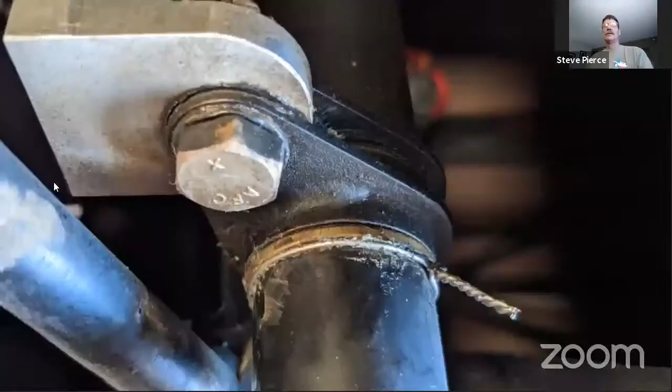So last week we showed the video of the leading edge of the horizontal clicking back and forth because there was a gap between the horizontal stabilizer and this liner tube. So last week I had to put safety wire in one - this is actually on a Carbon Cub, but same setup. You can see where I put the safety wire in between the liner tube and the end of that horizontal stabilizer to take out that slack. I just twisted the wire, cut it off short, and bent it under where nobody will catch their finger on it.

I don't think I covered this, but what I do after I cut - I've had this happen several times, had it happen on my dad's airplane after we put it together. You get paint and dope and glue and all that on the end of that tube, and when you pull it together to drill the hole and put this bolt in, you have to drill that tube. You get it all pulled up tight, but then over time, that paint and glue and fabric all wears off the end of the tube, and you get that slop. So what I've been doing is taking a flat file and going over the end of the horizontal on each tube, the rear tube and the front tube, and cleaning that off to no paint, no glue, and no fabric.

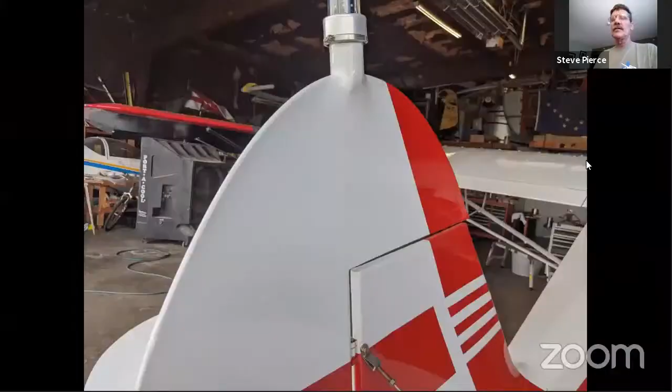Another thing, if you've got all different size holes there, take a piece of cardboard, draw the inspection like I do the wing roots - I've got a picture of that somewhere. I draw a picture of that opening, or all the openings, then take a pick and punch holes in it where all the screws go. As I take a screw out, I put it back in the drawing correspondingly, so I can put it back, because I hate when there's a number 4, a number 6, and a number 8, and you're trying to figure out which screw goes where.

It reminds me of the old flight school I worked at when I first got out of A&P school.

I don't know why this rudder picture is in here, the counterbalance. I think we're going to the rudder.

Okay, feel the bottom of the rudder. All the water tends to accumulate at the bottom, and if you grab that tube and pinch, you'll feel crunchy. That means you've got rust in there, and that's the easiest way to tell. You'll kind of see it, it feels kind of rough, and if you squeeze on it, it'll sound crunchy. Then you'll find what we found here on this one, where that bottom tube was all rusted out.

Now I've got a roller, and I roll this. We just take a piece of 4130 3/8, roll another tube, cut it out, and splice it in.

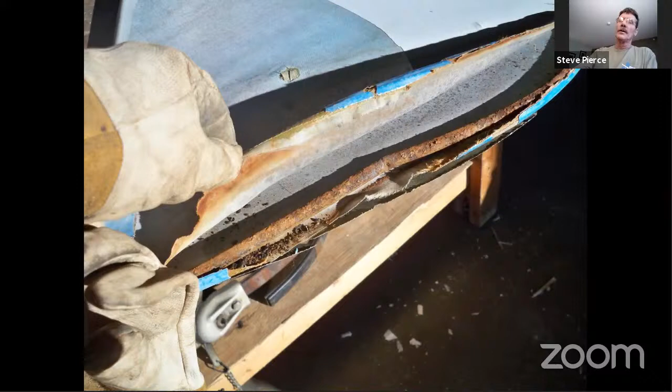Got that 114 Charlie - I found these held in with like one 3/16 inch bolt. There's supposed to be two 3/16 bolts holding that in. A common thing to do is grab where the rudder cable is attached, grab the welded-on steering arm for the rudder, then grab the tail wheel steering arm, the aluminum piece, and see if they move independently of each other. If they do, that steering arm is worn inside where those bolts are, and you need to address that, because it'll break that steering arm.

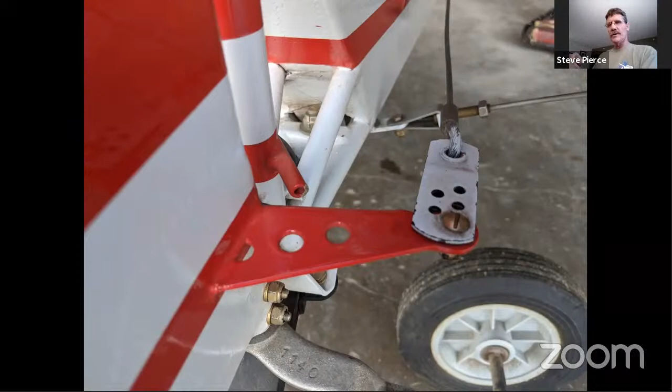It'll break it inside. I got some bushings, drilled and reamed, and put this oversized bushing through the rudder and through that steering arm - it's got a 3/16 ID. I just upped it a little bit and then put that bolt in there, and it took that slop out. But you'll have slop where you're trying to steer, moving the rudder, but the tail wheel's not moving at the same rate because you get all this slop in that steering arm.

There's another shot of it. That's those 2 3/16 bolts right there.

There was a discussion on supercub.org the other day about the tail spring attachment. This is a stock tail spring, and this one is a 1.25 tail spring with the original U bracket. That bolt that holds the bracket to hold the tail spring on - a lot of times I put a piece of rubber in there. Bill Duncan, when he was here last time, bought a big truck mud flap, and we cut strips of that on the bandsaw and punched holes in it, then used it between that tail post and the tail spring. It jacks it up a little bit to give a better angle, which helps eliminate the shimmy. I've seen fuselages where there's a worn spot where that tail spring has been wearing on that tail post fitting forever, and it gets a little wear in it.

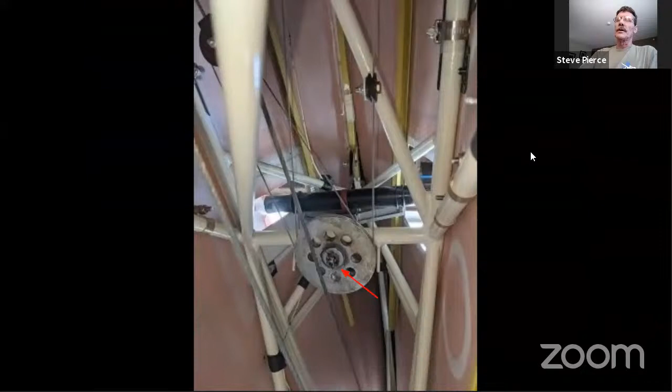Also, look at these - I look at every one. You see these clevis bolts holding between the rudder cable and the rudder. Those are supposed to be clevis bolts, not a 3/16 bolt, it's supposed to be a clevis bolt. Every cotter pin - and those are cotter pinned because they rotate - I put my eye and my fingers on every cotter pin on this airplane, because I've found missing cotter pins multiple times on control surfaces that would eventually fail and cause a serious issue, like lack of control of that control surface.

Also, you can see in that hinge right there for the rudder, that's got a cotter pin as well. And then there's bronze bushings in there. If you grab that control and it goes clunk, clunk, clunk, those bushings need to be replaced. I make a bushing tool to pull that bushing out and push a new bushing in - it's easier for me to use the tool than to just knock the old one out with a punch and knock the new one in with a punch. It doesn't mess up the bushing.

So anyway, some other stuff to look at just from looking at that picture. Okay, I went too far - can you go back one, Steve? I'm sorry, I'm impatient. Another common problem that I get into.

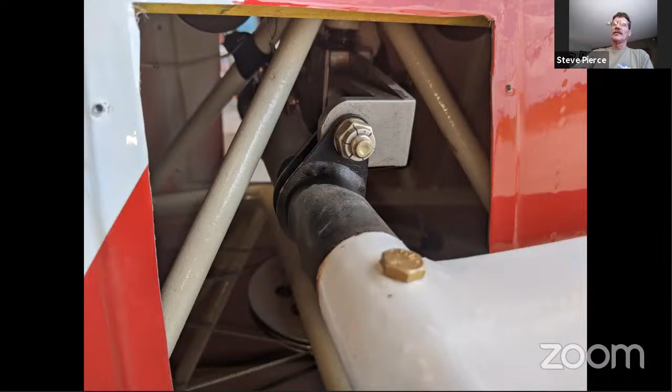So here's the outside view also, where this is a 5/16 bolt. Take the horizontal and shake it, move it back and forth, look and pay attention at what's moving. If you've got a clunk, clunk, clunk, sometimes these bolts will have slack in them. Piper used shim washers between the ears on the yoke and the ears on this carry-through tube, so you can shim that out.

You can also just do a quarter turn or a 16th of a turn of that nut right there and take some of the play out. But you want some play because that is a moving surface, and you also want to lubricate that. You don't want it moving back and forth, clunking between the horizontal and the carry through tube, or between the carry through tube and that aluminum jack screw yoke. So lubricate, inspect, and tighten if necessary.

This is a video. Let's see if it will play.

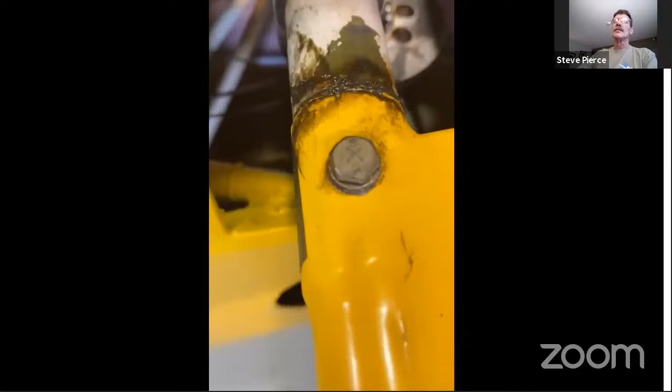Okay, this is the play that I was talking about where I put the safety wire. This is a custom job. I met a mechanic recently, a friend of a friend, who isn't familiar with Cubs and sent me this video. Dang, Steve, your internet's not very fast. There it goes. And he goes to the other side because he doesn't realize how it works.

Steve, do you have any more videos? Nah, that was it. Okay, I just didn't have the volume on, that was my bad. Well, if you want to play it again, it was going clunk, clunk, clunk.

Hang on, let me see if I can figure that out. Jason? Yeah, he works for me.

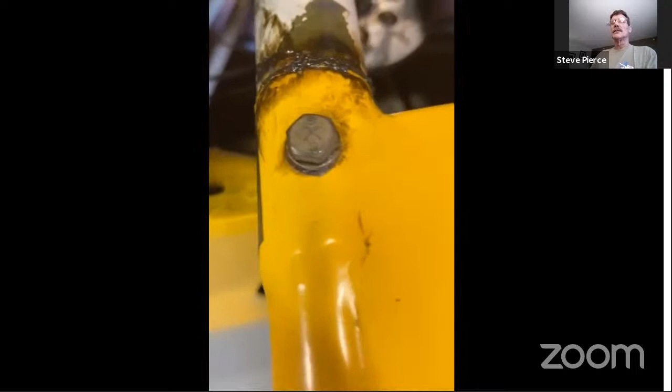That was it. The safety wire fills in the gap. There's a gap there, and you're just taking out the gap with the safety wire, Peter.

All right, you can go to the next one, Steve. It's not letting me for some reason. Okay, try it now. Yeah.

Okay, so this is the rear liner tube. There's a front liner tube and a rear liner tube. When you run the jack screw, when you run your trim, you're moving the leading edge of the horizontal stabilizer up and down to trim the airplane. It's pivoting on this rear liner tube that's depicted here. Now the fabric's off, and this is one that's in the shop for rebuild. So what we found is this rust between the fuselage and this nickel plated tube.

So there's a hole in that steel tube in the fuselage, and that's supposed to be an oil tube. You're supposed to put oil in that hole to lubricate between that liner tube and the fuselage, and that oil will creep in there and lubricate it. If you don't lubricate it, it'll seize up, and I've seen horizontal stabilizers actually bend instead of rotating on the fuselage. They just flex the whole stabilizer.

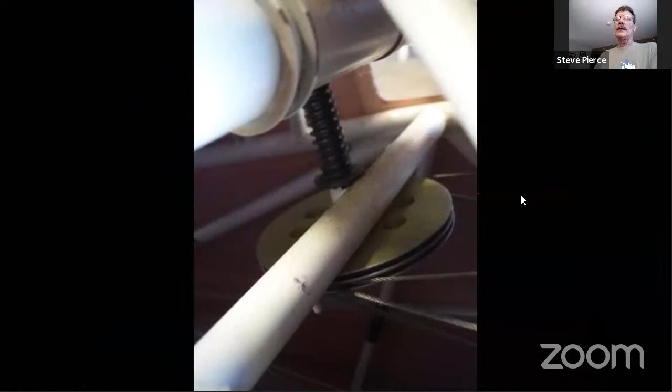Okay, here we go, being contrary. Here's the washer, there's the larger washer that I was talking about that's between. See, that's not supposed to be there. That washer, that large area washer that's at the base of that jack screw should be on top of that pulley. So what this one was doing is the pulley was rubbing on this cross tube.

You got to look at the parts diagram, and it's better if you look at the drawing, you can tell from the drawing what it does. If anybody has a question on that, I don't have my parts manual with me, but I've got those call outs with which washer goes where by the size of the washer, which is confusing because you don't know which washer goes where unless you have the drawings and look all that stuff up, or you buy new parts from Univair and take it out of the bag and go, this is this part and it goes here.

I don't even remember what kind of grease I use, to be honest with you. It's in that inspection sheet. It tells you what mil spec, and then you can cross it over to Aeroshell. But I use a high pressure graphite grease when I assemble it. You just don't want it to corrode. But I don't remember what the particular grease is.

And this is looking down through that jack screw at the pulley, and this is the one that doesn't have the big washer. It's supposed to be a larger OD washer between that pulley and the fuselage, and it acts as a spacer so it doesn't rub on the fuselage. I don't know why I put so many pictures of the same thing.

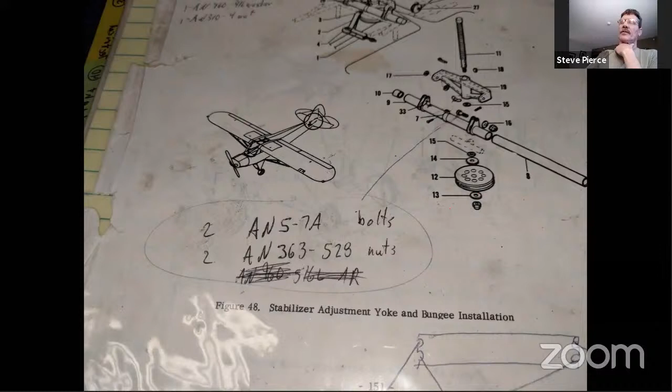Here's the call out. Here's some of the call outs. Those AN5 bolts that hold the carry through tube to the jack screw yoke, and this is all pictures inside of my parts manual. More call outs of different hardware stuff for that jack screw assembly.

And the nice thing, Steve's got the Northland CD, or now I think it's on a stick, but it has all of these call outs in it. If you look at the drawings, if you're going to rebuild this or get into it, I would highly recommend that call out. Now here's what I was looking for.

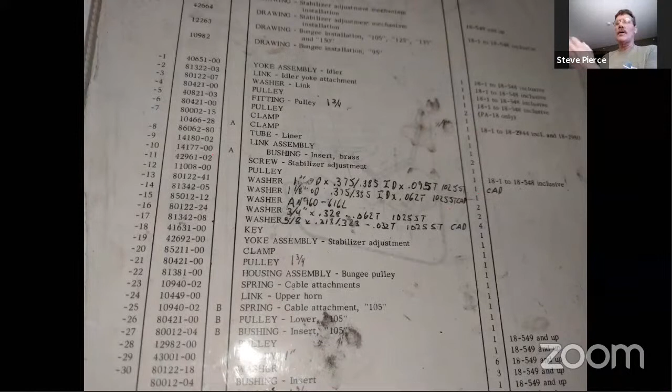So if you look at these part numbers, and the picture that it just showed, that 80122-41, that washer's 1-inch OD, okay, and then the other washer is the 1.125. So one's on the top and one's on the bottom, and you'd have to look at the item number over here. But these are my notes from going through all those drawings. So if you take a screenshot of that or write it down, but those are my notes on those washers. And what I did is I looked up all these part numbers of these washers and got the OD and the ID and the thickness and all that, and then I wrote that in my manual. So I put it together correctly from now on.

Now, the later Cubs had these fittings out of stainless. The earlier ones had them out of steel, and you'll see them really rusty and bad. If you buy them from Univair, they're made out of stainless, and they don't rust on the edges and get all nasty looking like the steel ones do. So they're not cheap, but it looks a lot better and probably lasts longer.

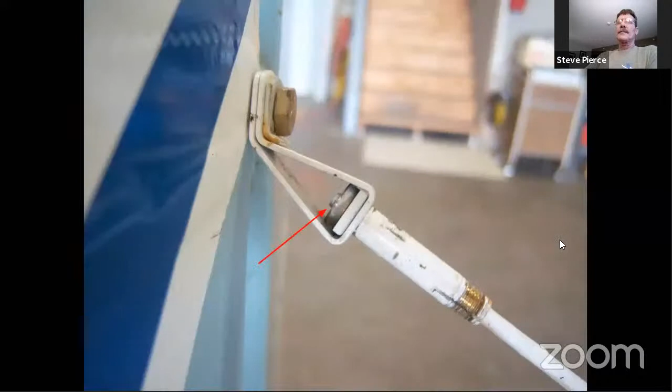The other thing to look for is these tail brace wires are threaded, and you can see in the arrow, just one or two threads sticking out on that end. Well, you want to make sure that you have threads extending into the nipple on the other side, right here. I found them where you got a whole bunch of threads on one end and no threads showing on the other. So you need to balance that out, because that's what's holding the tail, keeping the tail square. If you rip those threads out of that brass nipple because you don't have enough thread engagement, that'd probably be a bad day. See, this one, there's no thread sticking out.

And there's a 1/4 by 3/16 bushing underneath the head of that bolt. And there's also one on the fitting on the bottom. You've got tail brace wire on the top and another one on the bottom. What happens when you trim the airplane is that rotates ever so slightly on that bushing. That tail brace wire fitting will rotate on that bushing on that bolt ever so slightly.

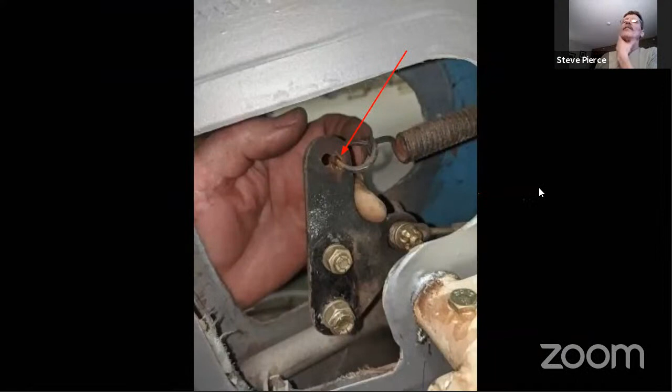So here, now, if you notice this opening for the elevator control is taller than a lot of, this is a later model Super Cub, and they started making that grommet taller than on the earlier one so that you could get to that bungee spring on the elevator. The later Cubs and the Pawnees all had the same grommet and had a taller inspection plate right there. It just makes it easier to access.

You can also see the grease zerk for lubricating that rear liner tube. And then you've got your bungee spring attached to the top of the elevator that is going to, as you trim the airplane, pull that elevator.

So before we got on this, Mark Inglerth and I, Mark's thrust line Mark, we call him. He's kind of the rigging guru, and he wanted me to cover some of this stuff on the trim system because a lot of people get confused on what that bungee spring's doing and what it's supposed to do to the elevator. So I'm going to read Mark's note to me.

He texted me this a minute ago. And he says, as you crank nose down trim in, the stick will be moving forward and come to a stop when the elevator is on its stop. So as you're cranking in the nose down trim, that stick's moving forward. You should have 5 or 6 full turns left when nose down with the elevators hit the stop. In other words, once the stick stops, you should have 5 or 6 more turns of nose down trim before the trim bottoms out.

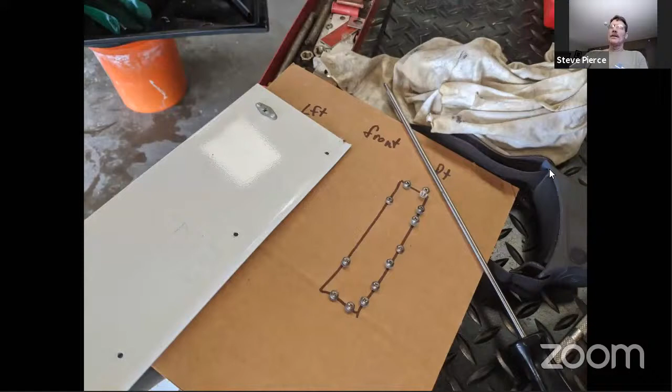So thank you. So this is the flip up window, and this is removing the wing root fairings.

So this next picture, when I was talking earlier about taking cardboard and drawing things out - in a lot of these airplanes they'll have all different size screws, and when you're going back you don't want to put a number 8 screw into a number 4 hole, because now you've just enlarged that hole. So what I do with this wing root fairing is take a piece of scrap cardboard, draw it out with a magic marker, take a scribe, and poke holes just like what's in the airplane. Then I put the screws back in the cardboard just like they came out of the wing or the inspection hole, whatever it is. That way it saves me time and aggravation when I go to put it back together.

Now this particular airplane I rebuilt, and I put Tinnerman nut plates in everything, so they're all number 4 screws. But in my own airplane, I've got every size known to man in there and a bunch of zip ties, because it wasn't done that way when it was rebuilt. But that's just something I do that I found works easy.

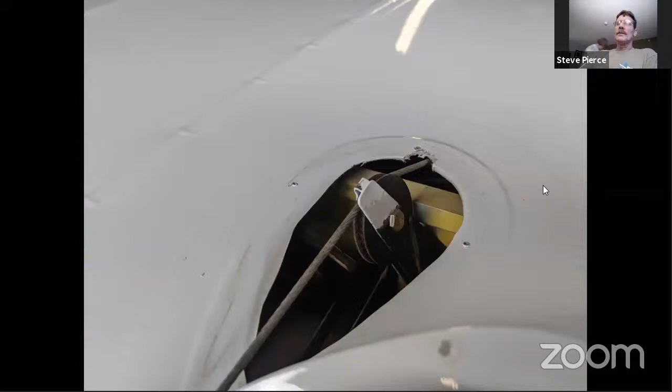These pulleys here are on top of the wing. That's the aileron cable, it's got the teardrop grommet over it, and these need to be lubricated and checked. I had a Carbon Cub recently with about 500 hours on it, and I always stick my finger underneath the cable and manipulate it - move it back and forth, make sure the pulley turns, and then feel that cable for whiskers. Well, both top aileron cables on this airplane had bad whiskers on it.

The only thing we could decide, because I've maintained quite a few Carbon Cubs, is this was just a bad batch of cables. Both those cables had some pretty bad whiskers on them. So I like to lubricate this pulley and manipulate it, make sure the pulley's rotating, and then check those cables good.

And check the cotter pin. Also, if you look at the leading edge here, see where I had to notch? This is that Cub that I rebuilt. I lined that cover up before I covered this airplane. When I put that grommet on, I had to cut it out a little bit for that cable because I didn't want the cable rubbing, and I'm using an aluminum grommet instead of plastic. Yep, LPS2 is what I use.

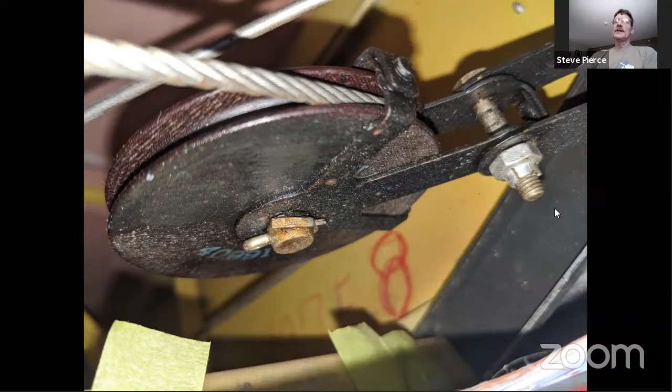Looking down the wing, paying attention for anything abnormal. These are the pulleys inside the wing, the main aileron cable. Same thing - look, feel, manipulate, make sure things are routed correctly, not rubbing on anything. You can see the cable here. I've seen them rubbing on all kinds of stuff. This compression strut here, John's was wrapped around - they put the compression strut in backward. That's an end strut, and they put some friction tape on there to keep it from rubbing through.

It was like that anyway. He got it fixed when he rebuilt the wings. But you know, just stuff to look at.

Rib stitching - now this cross brace is just for prior to rib stitching, it just keeps the ribs squared up. Mice will eat that, make a mess, whatever, but once it's rib stitched that stuff doesn't matter. Look for cut or missing rib stitching though, because mice like to eat that stuff too. That can mess up your day.

This is where that cable's coming out to that pulley on top of the wing. Look these fittings over - you see all this steel. You've got steel and aluminum, and on these later Pipers the aluminum's primered, but the earlier ones weren't. This airplane was a '79 model, and it'd been in West Texas all its life - you don't see rust on the steel, but I've seen some that were just horrid looking. These are those strut attach fittings that the service bulletin is on.

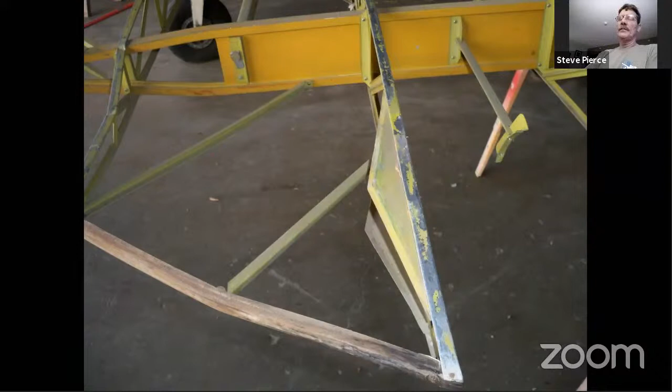They can be broken, but you can see this black at the trailing edge - that's where water settled in the bottom of that trailing edge of the wing. What happens, especially with dope, is it starts pulling and takes the roundness out of that tip bow, and you get flat spots. You can see that rot starting there at the trailing edge. There should be a drain hole at the bottom of that, right at the tip of the tip bow and that rib, so any moisture can drain out.

You can see this one's pretty good - got a pretty good flat spot, and that's really evident on airplanes done with dope, where the dope continues to shrink over time. Whereas with polyfiber and Stewart's and some of the polyurethane systems, you get the shrink out of the iron and then that's it. Nitrate will continue to shrink fabric and pull things.

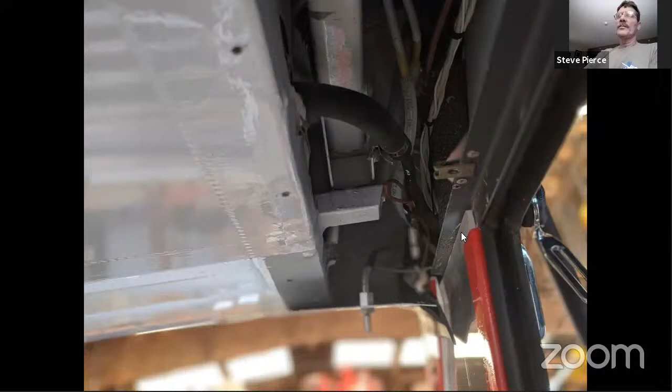Looking forward on the front left spar, you can see a probe for the outside air temp on an EI gauge, and another fuel line coming out of the tank into the tubing. You've got a rubber hose coming out of the tank, then it goes to an aluminum line down the wing root, down the windshield pillar.

And then you've got this - this is all headset jack wiring coming aft to the wing root. Just make sure all that stuff's tidied up.

See this blue? You can kind of see this blue stain, and this is wet - that's what you're looking for. Make sure that, because it can drip on the fabric, mess up the finish, cause a fire, whatever. But that's what we're doing in an annual inspection - that's what we're looking for. Smoking guns.

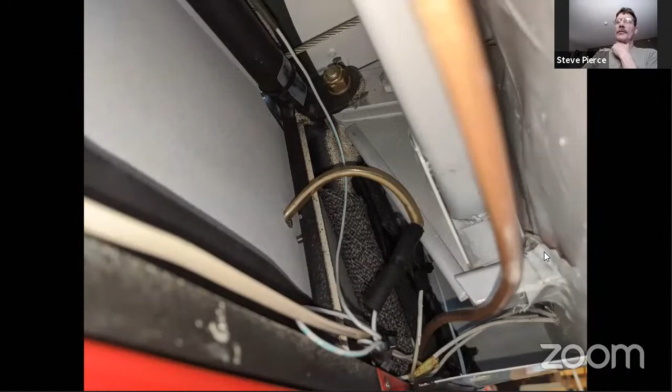Here's the wiring again - ELT wire going up to the remote. You've got a wire here going into your overhead light to shine onto the instruments, a piece of coax for the antenna, and your nut for the wing attach, and then there's a wire there.

That wire's not rubbing on that aileron cable going through there, is it? Hopefully not - that could be bad. That wire should be tied up where it's not touching, where it can't get onto that cable.

Also, you see up there where that cable's coming through - that's a piece of Teflon wrapped around with a zip tie. Now Piper used a piece of like phenolic cardboard, and they used friction tape on either side for that, so that cable wouldn't rub on that tube right there as it comes into the fuselage from the wing.

Here's the left side with the pitot and static lines, and you can see the cable and the nut and fuel - there's a lot of stuff going on in there. Look and look again, because like I said, there's a lot of stuff going on. You want to make sure that you don't have something rubbing on something or anything like that.

Another fuel line. Then you see the headset jacks back there.

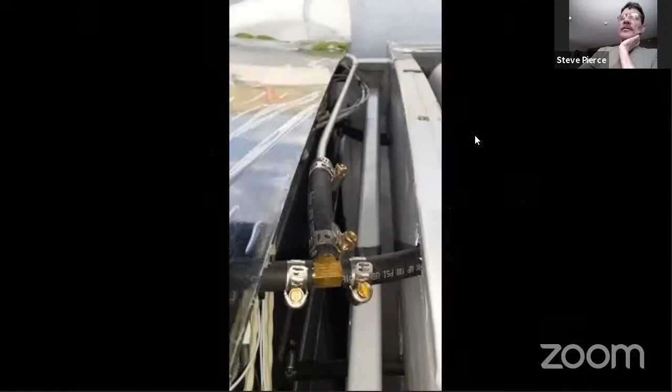Then this is the fuel line, and then a vent. This is a vent line back to the header tank if you're running the header system. Or if it's a headerless system, then this will be tying the two tanks together through the top of the fuel gauges. And if anybody watched that video that Corey Robin did where he stuck his airplane and his Carbon Cub on its nose...

He tied a fuel pump and a fuel bladder into his fuel line out of his wing. If you're going to tie another tank into, in that case, the left wing tank with a fuel pump, you think about the fuel runs out of that wing tank to the engine by head pressure, because that tank is above the engine. Well, when you plumb an electric pump in between the tank and the wing and the fuel valve, and you turn on an electric pump, that electric pump's putting out more pressure than there is head pressure.

And in his case, he was pumping air and fuel, so he got air bubbles in that system. What most people do - like what some of the guys I know that run belly tanks, fish spotters - they plumb that fuel line into the top of their sight gauge. That way they can see the fuel going into the sight gauge, and they can get every last bit of fuel out of that belly tank, because they can see it filling up that left tank.

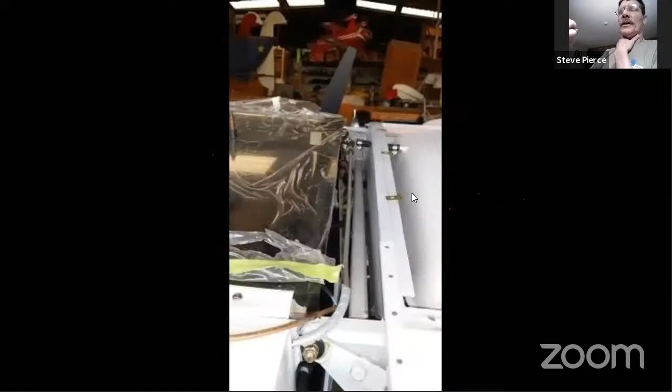So this one, what do you think? This didn't work. You get fuel, you fill up the tank, and you get fuel in the bottom of this rubber hose, and guess what? It doesn't go anywhere, it gets trapped there. It's like a P-trap in your sink in the kitchen. So the fluid gets trapped in there, and the gauge isn't going to work correctly. That line was supposed to go straight across there, not create a loop.

Just some common sense stuff. Also, this is the fuel tank bay in the wing prior to putting the tank in. As you can see, this is all SAE 50 felt, 1/16 of an inch I believe. It's in the drawings, I've got the drawings for it, and I sell this felt. This is what Piper used, and I've tried all kinds of felt, but the problem is you can't get the tank in there far enough.

It sticks up, it does all kinds of things. Since I started using the same felt that Piper used, I've had no issues. Now, if you look up by the wing attach fitting, so you've got the strap, you've got the ribs, Piper put felt on the ribs because the ribs will rub on the tank. Also, these angle braces that are between the butt rib on the left and the front spar, those wear into the tank. I've had to weld a bunch of tanks because that aluminum angle brace rubbed into the bottom of the tank. Now, on the short wings, they call out this felt on these angle braces. The Super Cubs, they do not.

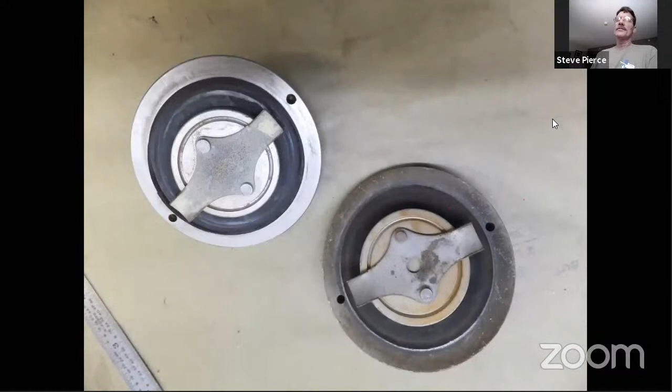That's all things, and I get up there, I pop the cap, I look at the inside of the cap, I check that gasket. Is that gasket good? Is it marked? Here's a couple, that previous cap was an Atlee Dodge cap, these are Univair caps. Is that gasket good, is it sealing good? Because it can vent fuel overboard. Is the vent clear? It's letting air back into the tank and not collapsing the tank.

Here's some deteriorated fuel tank gasket. Also, on these caps, if it's real hard to put that cap on, especially the Atlee Dodge ones, if you put a flat screwdriver underneath that tab and just pry up just a little bit on either side, and then try it and just go back and forth and take some of that tension off of that tab where you can actually get it on. I mean, I've had them where you had to get a wrench up there. That's ridiculous, you need to be able to get it on and off by hand.

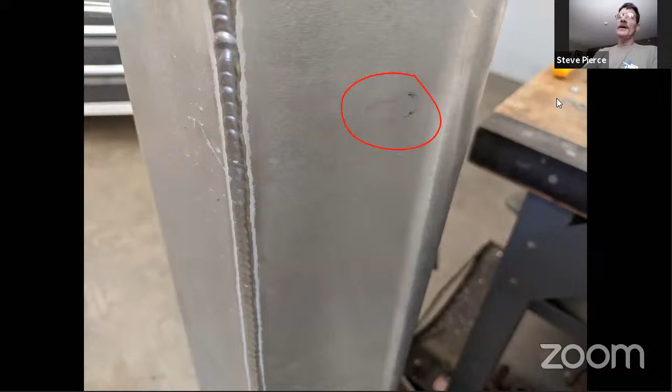So when you drop hardware, pick it up, find it, figure out where it went. This was a washer that was embedded in between the felt on the tank strap and the fuel tank. This was a pretty new airplane I was doing some work on. I had to pull the tank out, and I happened to hear something fall, and I looked, and there was an imprint of that washer. And on the tank, it's hard to see in this picture, but there was an imprint of that washer on the tank. Over time, that was going to wear a hole in that gas tank, and that was going to cause a problem and create a lot of work.

So if you drop stuff, figure out where it went, get a magnet.

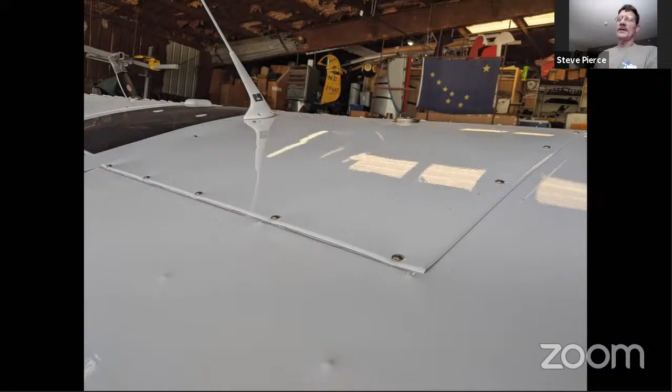So this is the fuel tank covers. I've had this discussion - the FAA in Alaska approved Randy Appling's carbon fiber tank covers. They said these are just fairings, and it doesn't matter what they're made out of. I disagree. I've had discussions with Wayne Mackey about the same thing. He covers them in fabric to save weight.

The tank cover - Piper used 3003 aluminum on everything. It's soft, it's not structural. However, on these tank covers, Piper used 2024 T3, 32 thousandths. So in my mind, if this tank cover was not structural, it would not have been made out of 2024 T3 by Piper, because they were doing stuff as quick and cheap as they could. Also, I find these crack a lot where the screws are holding the tank cover down. If this wasn't structural, why does it crack? I end up having to patch these a lot of times, but that's just food for thought. You can believe whatever, I have my own thought.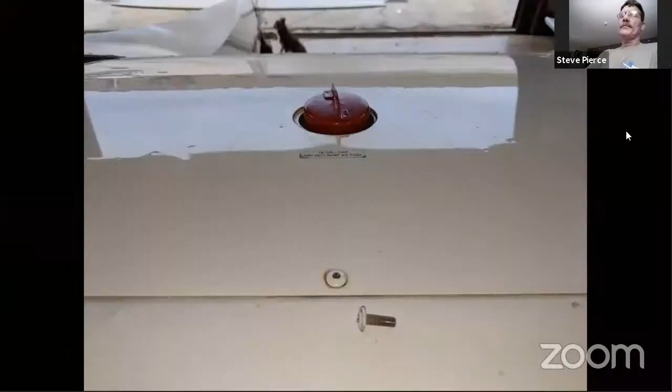I get this a lot. This false spar - this is the leading edge skin of the wing and the fuel tank cover. That leading edge skin is raised up above that spar by about 7/16 of an inch, 3/8 of an inch - well, I guess half an inch or more because these are half-inch screws. These are 10-32 half-inch screws, which is what Piper calls out to hold this tank cover on. I found 5/8 screws, 3/4 inch screws, and I found spars with big gouges in them from too long a screw being used and digging into that spar cap. To me, the spar cap's a structural part of that wing - it's going to keep that wing together. And when you start grinding holes in it with a screw that's too long, it's just sitting there working. It's not a good thing.

So these screws need to be half-inch, or they should be half of an inch - no, not any longer. If you put a longer screw in there, it's going to go into your spar and mess it up. So half-inch long, and it's in the parts manual on the front first page.

When you get it, this is the nut plate in that leading edge. You can see the nut plate, and then you can see a cable with a mud dauber nest. Anyway, that's the tank bay with the tank in it - that's one I took apart and found lots of fun surprises in. There's a whole bunch of mud daubers - they were having a field day inside there.

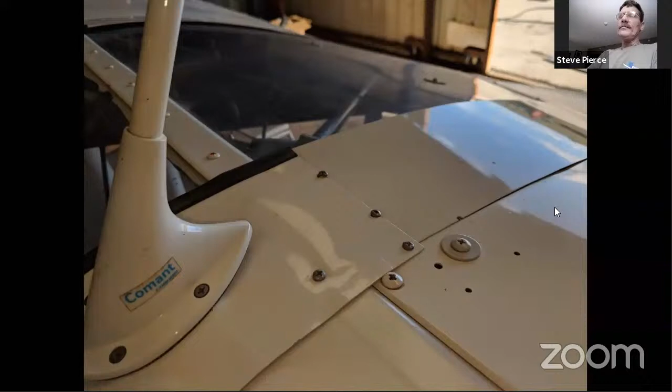Another thing that I see that's wrong - this is the wing root fairing over the top of the tank cover. Piper never did it that way. They put the wing root fairing underneath the fuel tank cover, and the screws for the fuel tank cover went down through that wing root fairing. In this case, what's happening is the screws - you put the fuel tank cover on, you put screws down to hold the tank cover, then you put this wing root fairing over the top of that cover, and the screws holding the fuel tank cover on start rubbing up through the wing root cover.

This is incorrect. And here's the correct way - you see the wing root fairing is underneath the fuel tank cover. That's the way it's supposed to be, that's the way Piper did it, that's the way the drawings show it. That's the way it works best for me, where you don't wear holes in things with the tops of the screws wearing through the top of another sheet of aluminum.

The other thing to look for is in the corner where the top fairing has a screw in that hole in the bottom left-hand corner. There's a hole in the trailing edge of that wing root fairing, and you tighten that screw up. You attach it at the front at the leading edge, then tighten it up to get tension on that wing root cover to pull it down tight over the skylight and over the wing, and you'll get cracks in that trailing edge piece. Those things need to be addressed because this wing root fairing will get sloppy and flop all over the place.

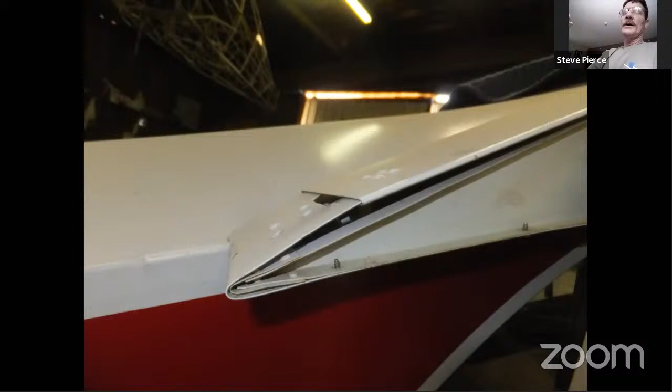And this is a late model Cub, it's a '79, it's got the aluminum flap. This is one where somebody compensated and cut a notch out - they kind of made the fairings how they wanted and they didn't fit worth a flip. You can see it's got a big gap, and they cut a notch up there. Take the old parts, or buy the parts from Univair, or take the old parts and measure off of them. You can see this notch they cut so the top fairing can come down far enough.

Again, the flap gap seal - that's what I was highlighting. There's the flap gap seal, making sure you've got flap gap seals on. Yep, there's a flap gap seal again. That's a common deal - I've seen several airplanes without them.

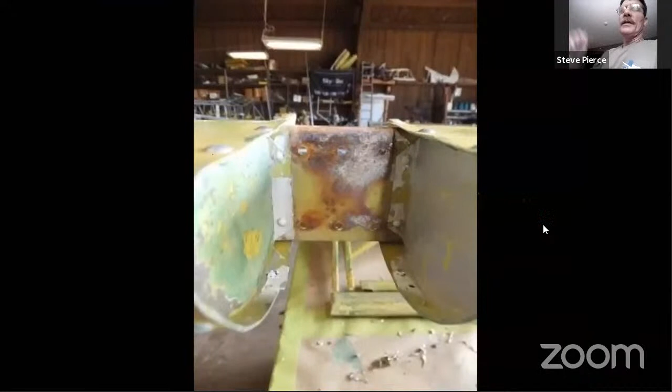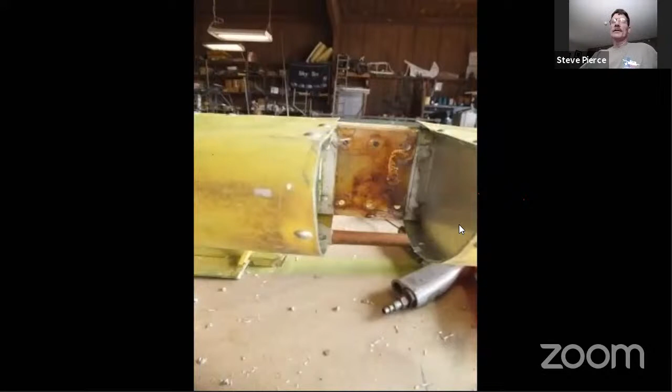Then we get into the ailerons and flaps. The hinges on the ailerons and flaps are made out of steel. Look between the steel and the aluminum - a lot of times you can't see anything. These are some that I've drilled apart because you get dissimilar metal corrosion between the aluminum and the steel. Look in there and see if you can see anything going on. More than likely you can't, but if you can, you've got some serious problems because of dissimilar metal corrosion. But like I said, these are some that I took apart at rebuild and found the rust and corrosion. You can see that white powdery substance - that's the corrosion between that steel and aluminum.

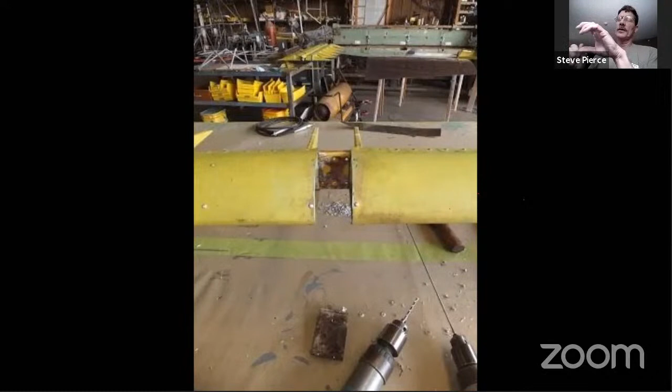I've had ailerons where there's a hole completely through it, through the spar. And anyway, somebody posted on Facebook recently - it was a Clipper, same aileron as a Super Cub, and they were grabbing the aileron and moving the bell crank on the aileron independently of the aileron itself, which told me that whole thing was corroded away and in really bad shape. That'd be a total control system failure - would not be a good day. And that's what you're looking for on those cables.

That's an aileron cable, and that aileron cable is right. I believe this one was where it came out of the fuselage, where it came off that pulley. So the wear places I've found are where the cable comes out of the fuselage at that pulley in the floor, kind of in front of the back seat, and where it starts to go up the lift strut.

Then where we showed on top of the wing, where it comes out of that blister and goes to the top of the aileron, and also the first fair lead up the lift strut on the seaplanes that came with stainless steel cables. Going through the records of the last one I rebuilt, every 500 hours they would replace the aileron cable. It had been 500 hours when I rebuilt the airplane, and at that time both of those cables were worn.

It had frays like this at that nylon bushing, that fair lead, the first fair lead up the lift strut from the fuselage. There were frays started. Now those were on stainless - I haven't seen that on the galvanized, but on the stainless. This particular airplane left Piper as a seaplane. But look over everywhere - I've also seen them where they came through the fabric, if you can believe that.

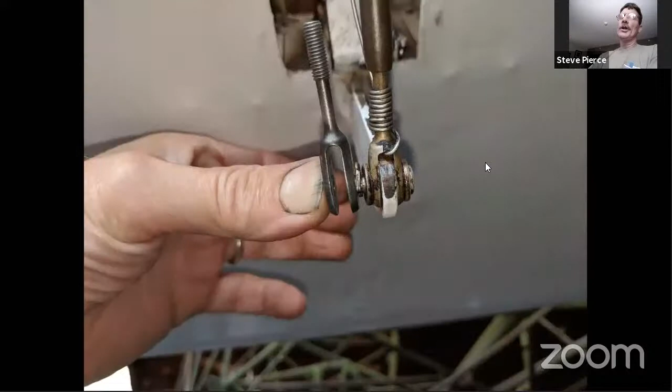These are special Piper rod ends, Clevises. The AN ones do not work unless you go grinding the metal on the aileron bell crank, which has been known to have been done. People have done it. Now there's a comparison - the one on the right is where somebody smarter than Piper, and smarter than their wallet basically, used an AN Clevis and installed it. You can see where they ground the paint off that aileron.

That's the newer Dakota Cub aileron, but they ground it down so they could get that fork in there. On the left is a Piper fork. Those Piper forks aren't cheap, but it's the correct part, and you can put it in there without having to grind on the structure of your ailerons. I've found this multiple times - that's real aggravating to me.

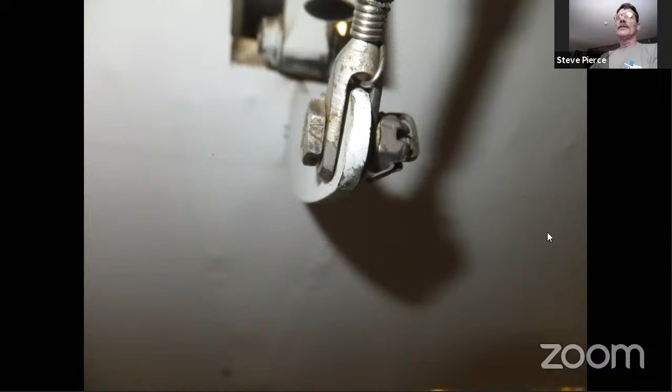There's another one. You can see there's not even enough gap to get the safety wire through there, so they had to wrap it around the bolt. That's just blatant to me. If something doesn't fit, figure out why it doesn't fit - don't go grinding. But anyway, there's one where that fits correctly, but it's got a bolt instead of a Clevis.

They'll check your aileron and flap hinges because they wear. I think that's an aileron - outboard aileron, inboard aileron bushings will wear, or what it is, not really a bushing, it's got this aluminum block. You want to address this because if it starts wearing, it will wear on the aluminum first. But if it's allowed to go for a long period of time, it'll wear the steel out of the aileron itself.

Now you can replace these aluminum blocks by drilling out these 2 steel rivets - it's kind of a pain. Univair bought the STC. There was a guy in California that had the STC to put a stainless steel hat bushing in the aileron and in the aluminum block. You ream it, it comes in a kit, you ream it and epoxy these hat bushings in, and they're made out of stainless, and they'll take that flop out.

Univair owns that STC now, but there's not a replaceable bushing in here. You have to replace the whole aluminum block, which means grinding these steel rivets down, drilling them, getting that block out and replacing the block. It's not a fun process.

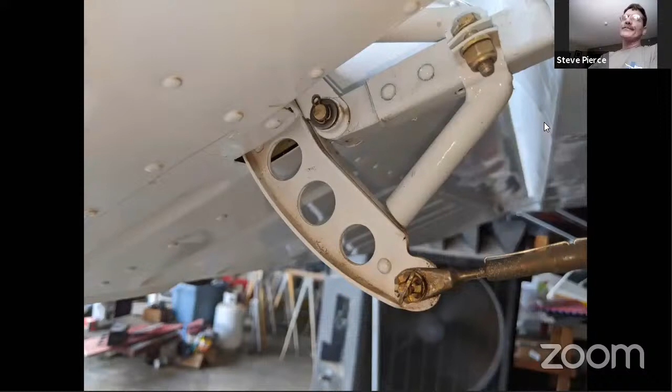These aileron stops - you've got a control stop inside, underneath the rear stick, to get the control throws the way they're supposed to be. These stops here, with this 1 3/16 bolt, that's to keep in a windstorm or something, to keep that aileron from going too far over or too far under. It's not a control stop, so to speak, for deflection.

I've heard of some people that didn't have those and they got their ailerons bent forward in a bad windstorm. And I've seen these where the top was rusted because water got into that tube and rusted it out.

But again, we're checking cotter pins, we're lubricating. LPS 1, LPS 2 - LPS 1's not as ugly when it streaks back. And then check that bushing, make sure that is tight.

Usually the center bell crank doesn't wear like the other ones do. This one wears - this is the flap one. Just take the flap and push up and down and listen for a clunk, clunk, clunk.

Make sure it's not the actuating rod on the inboard, but the flaps tend to wear as well. Same deal with that kit from Univair, or replace that aluminum block. This arrow is pointing - this is the inboard flap hinge, and you see that flap hinge can get hung up on the corner of the wing attach fitting. There should be a washer in there.

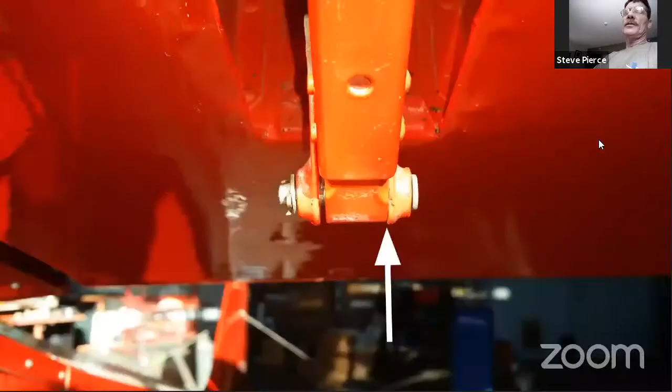There should be a washer in there. There should be a gap because there is an interference issue there. You can see where it's flush up against it.

Anyway, something to look at. You can see where it peeled the paint right there from the interference. Same there, it peeled the paint off because it was hitting. So make sure you got a washer in between the wing attach bracket and the hinge on the inboard flap hinge.

This one pissed me off, this one was aggravating. Somebody decided to put a Cessna hinge or a Cessna pulley in here, so they welded a washer over the pulley cage, and then they made their block between the strut attach fitting and the pulley bracket - that square piece that's supposed to be round. It's too long.

Anyway, this airplane was a mess. It took us a lot of time to get this thing back to airworthy, and people took a lot of liberties because they built the airplane and sold it. It was one of those deals - they bought it for cheap, it needed to be recovered, they recovered it, and then they took liberties with it and sold it. Then it came to me, and it took a lot of time to get it right. But yeah, that welded washer and that small bolt was a dead giveaway.

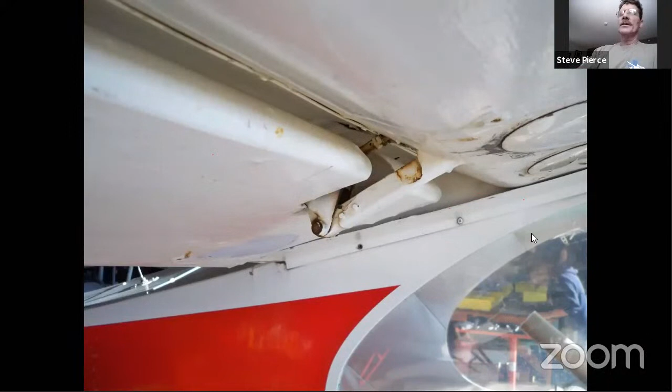So rust and corrosion - these hinges are steel, and they've been on how long since that was recovered, and what kind of primer did Piper use? Not very good. You can see this rust emanating out of this hinge, and look that stuff over, because we're going to see more and more issues from rust and corrosion in these airplanes.

Because some of them are 70 plus years old, and they've been recovered several times, but have they been rebuilt? Have they taken the steel out and bead blasted it and epoxy primed it and put polyurethane top coat on it and put it back together? Or has it just been recovered? So you got dissimilar metal corrosion between aluminum and steel, eating away at it.

Grab that hinge and move up and down on it. Does it move? Does it shake? It shouldn't, it should be solid. But just due diligence, look for rusty stains.

I mean, there's a lot of tattletales that I'm pointing out here, a lot of it's common sense, but a lot of it, if you don't think about it - oh, that IA looked at it and that IA looked at it, well, they might not have paid attention. So look for that stuff.

You can see this rust, I mean it's just that U channel is just catching. And see, this aluminum block, this hinge block, there's a corner cut out of those so that moisture can run out of that U channel. That steel, where that rust is, is a U channel. So water can get in there and it should run out the trailing edge.

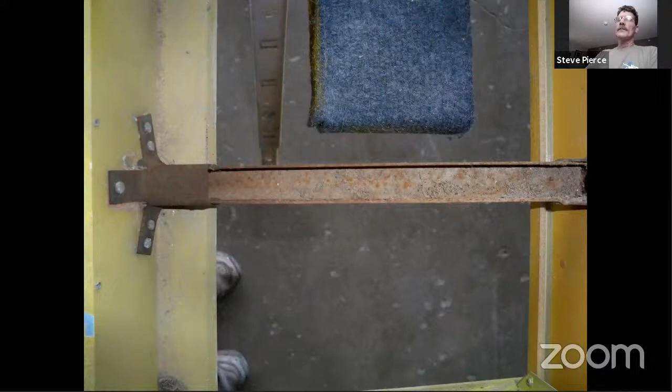You can see all that, dirt collects, moisture starts rusting. Clyde Smith told me that Piper used the dope out of the bottom of the vats for primer. I mean, later years they used good primer, but early on they just sprayed some stuff on there. They weren't expecting these airplanes to last this long.

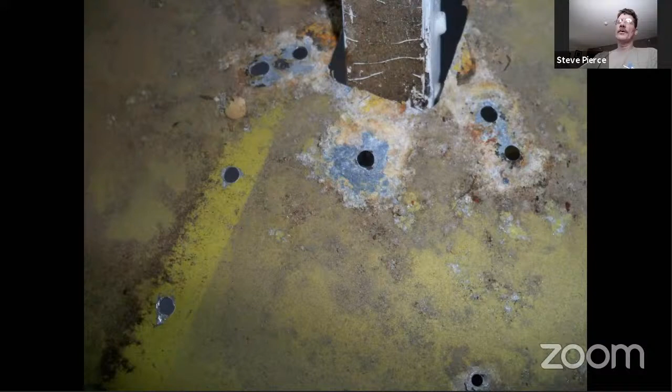There's some dissimilar metal corrosion where I've drilled one of those hinges off. You can see where those steel fingers and that white residue is, that's where that aluminum and that steel were having a party and exfoliating.

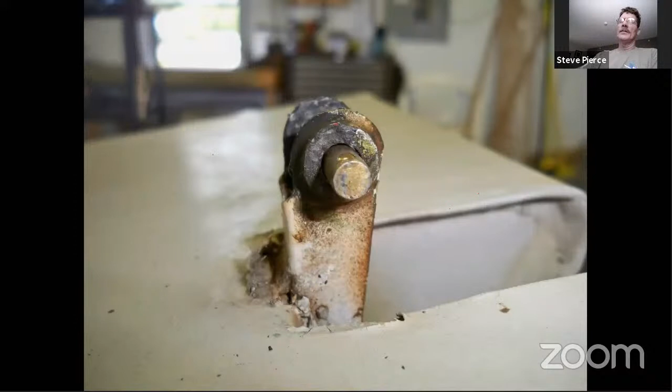This is one of those stainless bushings for that STC that Univair sells, and that's epoxied in, and they give you a fitting to hold it in while the epoxy sets up, and they give you the reamers and everything. It's a nice kit, and it's stainless, so hopefully it'll wear the pin, not the fitting next time. You can see how this hole is pretty walled out, and I think this was on Kathy's tri-pacer actually, that I did the first one.

Why'd you get your hand up, Kathy? I got a little thing that says your hand's up.

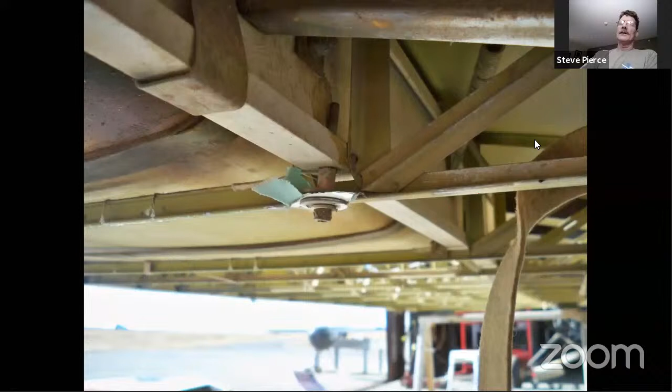So when I uncovered this wing, let's see here... I'm getting used to this. Come on. There we go. So this is that internal wrenching Allen bolt, and it went up through the spar cap, and it cobbed the web. It got on the web of the spar.

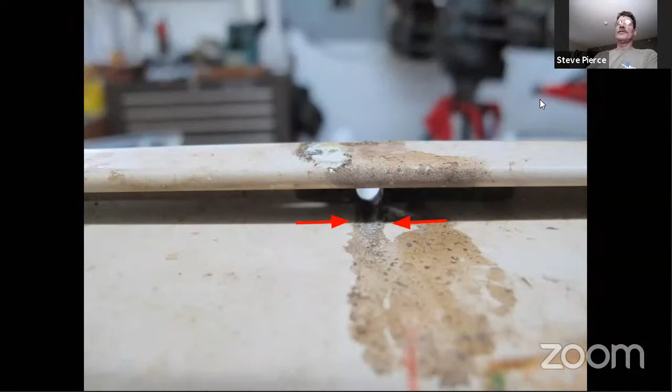There's the hole in the spar, which I wouldn't want to fly around worrying about. Come on, there it is. So that's where it cobbed the spar web, and to me it compromised the structural integrity of that spar.

And we had a short question with the owner. Well, what do you think? And I said, well, I wouldn't want to worry about it if I'm flying around at gross weight in the mountains in turbulence. I wouldn't want to look out that wing and wonder, is it going to hold, is it not? I'll spend the $300, $400 for a new spar and have peace of mind. So, decisions you get to make.

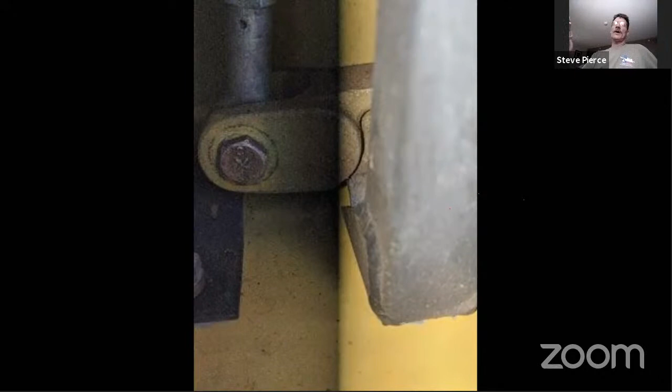These are so you get into inspecting the flap mechanism, manipulating the flaps. This is the bell crank on the flaps, the cotter pin where it rotates, that's a cast aluminum bell crank. This is not a good picture, but where this bell crank is in a fork, people will over tighten that and will crack that bell crank right there.

And that's from over tightening. There's a specific length bolt and specific washers called out in that parts manual and in the drawing, so that it will not be over torqued and will not crack that casting. But that's a common PA-18 issue, same thing on the aileron bell crank.

This was a good one. I got this the other day, a couple of weeks ago. Somebody wanted to know how many threads could be showing on a Piper strut, and dang it, I have to look that up now. I think it's 15.

It's in my Clyde Smith notes, but that was a little excessive, and I think I posted that on the website because it did not meet spec - it was in the rigging. I finally found where Piper called it out, I think in the rigging instructions or something. But it's, let's see here, 15 thread max showing on a lift strut.

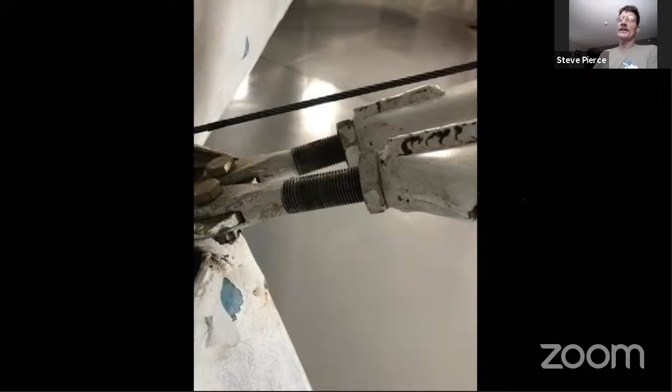I finally found it in a service memo somewhere, but this was way more than 15 threads, and they were trying to rig out a fuselage that's been repaired and not repaired right. I had a mechanic over in Dallas Fort Worth area contact me asking that question, and I told him what I had in my notes, but then I had to go find the reference, and I finally found it. Another thing, those strut attach bolts are special Piper bolts, and they're shorter.

The threaded area is not as long as a regular AN bolt, and the reason is you do not want any threads in that shear area between that fork and the fuselage fitting. Also, you don't want the bolt extending down further. If it was longer, this gear - if you prang a landing, the gear will hit the bolt and it'll bend the gear, because there was a service bulletin - Piper was selling NAS bolts for that for a while that were too long, not like the special bolts that Univair has.

So then you had to put the bolt in - they came out with a service bulletin, and you had to put the bolts in upside down so they wouldn't be too long to hit the landing gear. Well, the problem there is you're out in the middle of the field, some guy's knocked his gear off, and you've got to pick the airplane up and take the gear off. You got to take the wings off, take the gear off, because you can't get that strut bolt out. I had to do that, and it wasn't much fun.

So if you get the bolts from Univair, they're the special Piper bolts under the Piper part number, and they just have enough threads to catch that nut, with no threads in that shear area, that fork, and that fitting. I found that a couple times, actually. There's one right there - you see it's too long, and then on that gear you see that little pop mark right underneath that bolt.

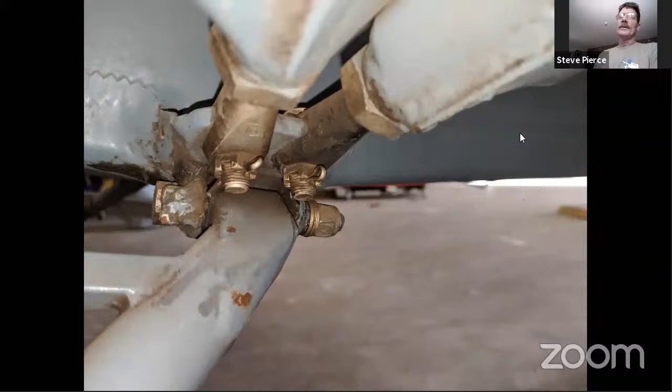That's where the gear was hitting. So you can see how much longer that thread is than that nut. And if you go back to the fitting or the picture before, those threads didn't - there's not that much thread sticking out on the bottom, not near as much. Just another one of those little things that irritates the snot out of me. But if it was easy, everybody'd do it.

Can you play that? Another video. I don't remember this one.

That's some crazy music going on there, Pierce. That was probably some Joe Bonamassa or something.

Who knows? You missed Paco laying on a dozer in the background, but that was this common problem of getting that head loose on the tail spring. I tell people as a pre-flight, go back there and kick that tail wheel and look and see if that tail wheel's moving on that spring.

Crash Jr., if you don't know who Crash Jr. is, that's Crash's son, Gabe, that works at Airframes. He's been participating in the tail wheel shimmy discussions, and he was talking about these springs coming off real easy.

I don't know, the Univair springs I've been using - I got to use these pliers, these inner snap ring pliers, to spread those apart to get the chains off. I posted some pictures and actually found another set of these pliers on eBay. But I've got a toolbox that I keep all my tail wheel stuff in.

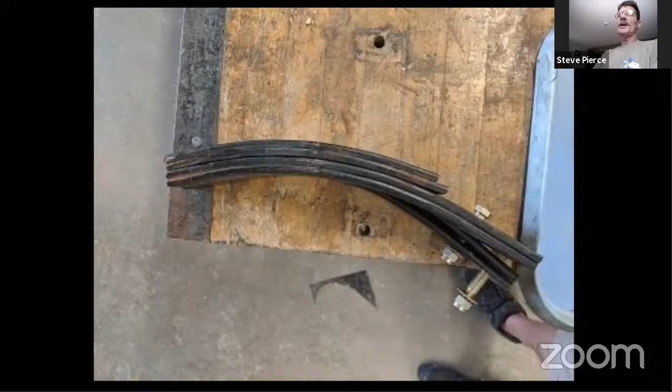Now this is spring arch, and there's a current thread on supercub.org about this. This spring in the front, closest to the screen, is an older Pawnee spring that's been on the airplane - who knows, I've seen them lose their arch in a year. On the bottom is an Airframes spring that's got the proper arch to it and won't shimmy. You can see the difference. I've literally seen these springs lose that arch in a year and start shimmying on a heavy-tailed Cub.

This one on the bottom that's real flat, that was the first Super Cub I rebuilt. You couldn't even steer it on the ground, it was so bad. And that guy, that was the cause of that accident, in my opinion, because that spring was so flat you couldn't manipulate the tail wheel because of it. And it contributes to tail wheel shimmy. So pay attention to the ass end of that airplane, because it's going to tell you — it gets more abuse than anything if you think about it.

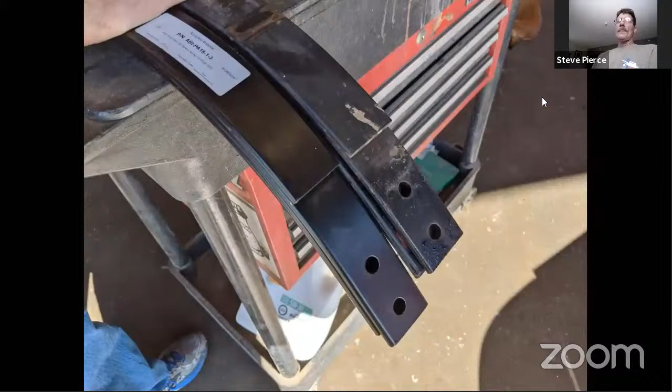And there's the same thing. Now these are 2-hole, and I ended up — my head would get loose on my spring, and Tony that I fly with all the time, he went with a two-headed, or 2-bolt head, and so the next time mine was loose, I went with a 2-bolt head and I haven't had any more issues out of it. But you can see the difference in the 2 springs. That spring on the right's got a lot less arch in it, which is going to contribute to tail wheel shimmy because you're going to lose that angle of that head. And it's going to be like a shopping cart that's hit a curb — it's going to vibrate all over the place.

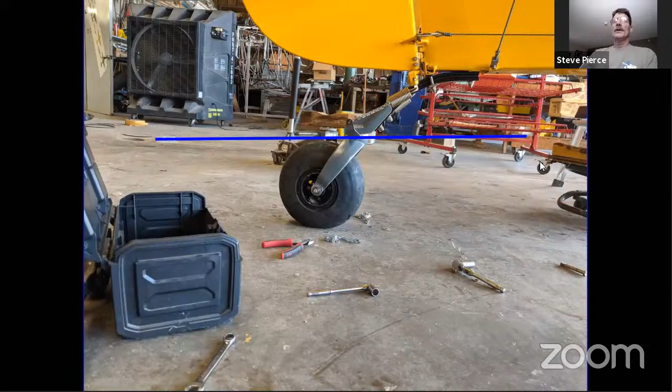And there's the angle, as you can see, this one's kind of flat. And if it's flat or it's kicked back, it's going to shimmy.

And that's my toolbox. That toolbox has got everything in it to change that tail wheel, to do with the tail wheel, tail spring, everything, because my back hurts and my neck hurts and I'm tired of getting up and down on the ground. So I put everything I need to do that job in that box, and whenever I go to do that job, I grab that box. Getting old sucks.

There's my tail wheel box. Got everything I need in it to pull the tail wheel. It saved my back and my knees.

What's that eye bolt in there? That's Bill Duncan giving me all kinds of treasure. That's one of those bush wheel eye bolts. Everybody said they broke and cracked and all that. I've got one on mine and it hadn't broken or cracked yet, but I've got 2 bolts — I've got an eye bolt and a regular bolt, and I keep looking at it and it's fine.

I liked mine too, but Bill had those made, and then somebody — I think Tim Allen broke one. Somebody broke one, and that's

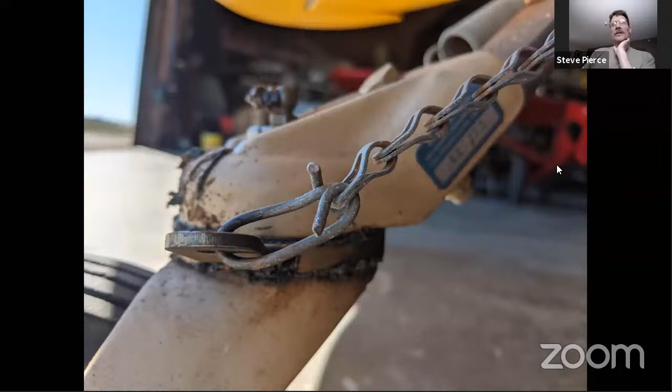Supercub.org lore back then. You can't — oh, I can't spell. Yeah, Lou's telling me I can't spell old. Lou, when you crawl around on the floor for a living, then we can talk.

So this is the bolt that attaches the tail wheel to the spring, and that's a grade 8 washer. If you put an AN washer on there, they're soft and they'll cup. So I've got a stash of grade 8 washers that are larger OD and also harder, and they won't cup. So on the tail spring attachment I use those grade 8 washers between the head and the tail spring, and between the fuselage and the tail spring. Had a lot better luck with that.

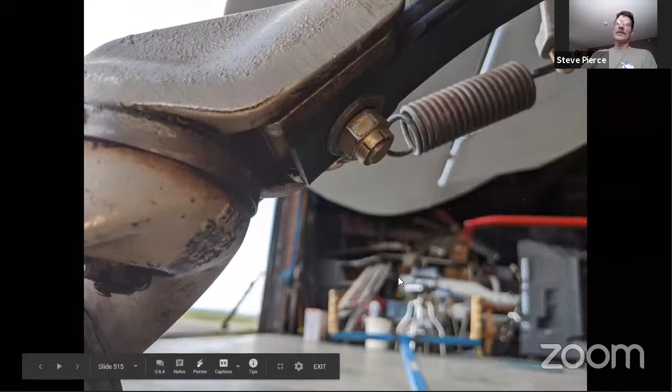This is another picture of the aluminum steering arm on the bottom of the rudder. Look for play between that steering arm and the rudder itself, because you'll lose steering, and if you let it go it'll get worse and worse and cause more and more problems. It's harder to repair.

These are AN3 eye bolts — I can't remember the exact part number, but Spruce carries them, that's an eye bolt. And I put that in that steering arm because with these springs, a lot of times they'll put the spring directly in that steering arm, but it wears an oblong hole in the steering arm. So I put this AN bolt in there with a nut on it, and then it just rotates, and the spring can wear on that eye bolt and not on the steering arm. So steering arms are expensive, and you got to pull the tail wheel spring off to get them out. It's just on and on and on, it turns into a snowball.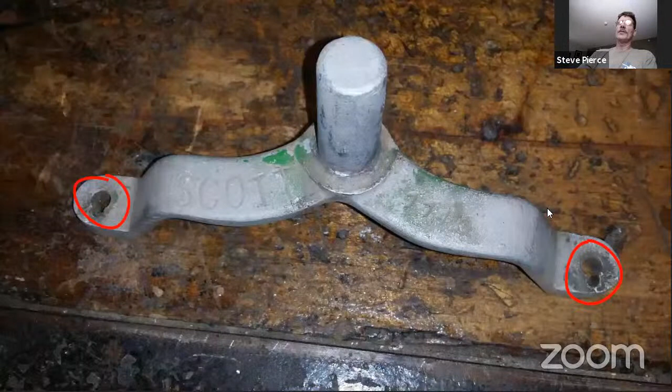And here's what happens if you just use the spring without the eye bolt — it makes a figure 8 hole. Will you go back to that picture, Steve? I don't know if everybody caught that, but there's a figure 8 hole right there.

And then I changed that wear on the tail spring bolt between the head and the spring. I keep those things in stock, the AN7-21 or AN7-22, depending on what spring you got. But I keep them because I replace them most every year.

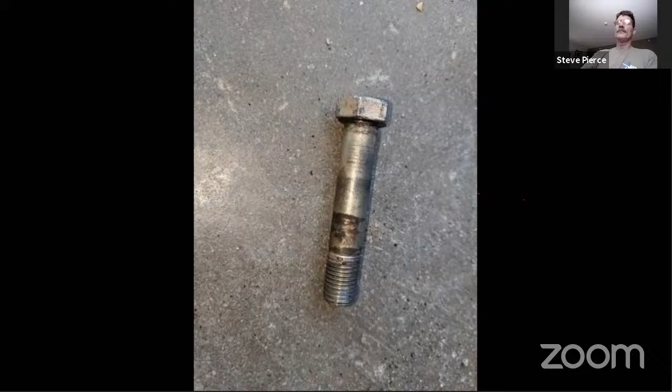Just because it's a high wear item and it's sitting there trying to break all the time. So, there's one that I pulled out not too long ago. That one had been in there a while. You can see the corrosion on that bolt, and it was just a matter of that. It wasn't going to take long, I don't think, before that one broke. And that was between the fuselage and the spring.

But I changed the spring, and that was the bolt I found. You can see all the corrosion in there. And there's a sloppy hole in the steering arm. You can see that shadow around those bolts. Just a lot of play.

Hey Steve, somebody on YouTube asked if you have an opinion about the T3 system.

No, I'm certified and I'm just using springs. I don't know that much about the T3. I've worked with that version, the one that Acme makes. I've worked on that on a Carbon Cub, and it's pretty nice. I've talked to Dan about the T3, but I haven't used one.

The kind of flying I do, I keep the tail up until I stop, and then I set the tail down. I'm not running in any rough stuff. We'll get some gravel and rocks, but nothing real rough. So there's a lot of people that like it, but it's open for debate on the approval as well.

Anyway, I know Acme's working on the approval. I'm not sure if Airframes and Dan are working on approval of the T3 or not, but it would take some vibration and shock and all that out of the tail, which would be a good thing.

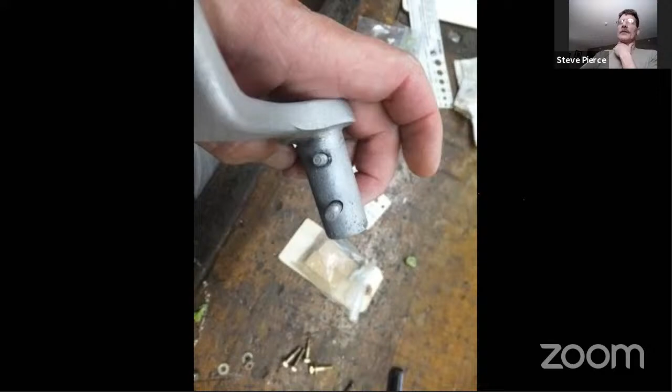So we talked about having another one of these videos on just some funny stuff that happens, but these are the bearings out of the tail wheel of a buddy of mine that took a 90-degree turn into the river, chopped the power, and powered himself out. I didn't believe him, I didn't see it. One of our buddies saw him do it, and I got there and they told me about it, and I thought they were pulling my leg until I saw water running out of his hubcap on his 29-inch Airstreaks. And then I believed him.

And then when I did the condition inspection on it, I found rust in the tail wheel bearings. So if you get your tail wheel into the water, you might want to look at those bearings, because even with the lip seals that Bill Duncan came up with for the Scott 3200, you can still get some water in there and it'll rust those bearings in the races, and they're not fun to get the races out.

But okay, now we're on to the brakes. So, Cleveland double puck brakes, pretty much standard on Cubs. Some people might still have the old expander tubes, but anyway, these calipers are magnesium most of the time. Sometimes they're aluminum, and they're prone to corrosion, leaks, whatever.

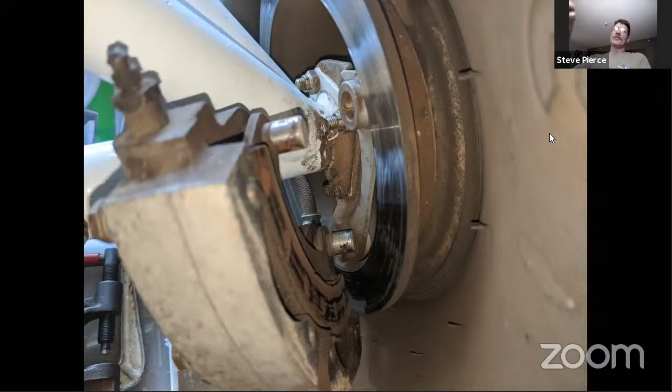This is my little toolkit for servicing brakes, and I look at them every annual. So these pins that the brakes pivot on need to be lubricated with silicone spray, because silicone spray will not attract dirt, and it'll allow those pins to slide on that torque plate, and that brake needs to slide because it needs to wear evenly on both sides of those pads.

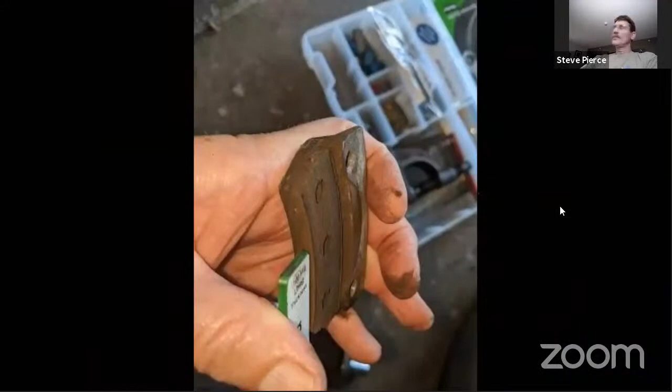This particular one, if you look in the bottom corner there, see this pad on the right, all that dark gooey stuff, that's from an O-ring leaking on the brake caliper. You've got 2 pistons in there and 2 O-rings. It's pretty easy to pop those out and put new O-rings on. This is a Cleveland tool to check the gap on the pad, it's 100 thousandths.

The pad minimum is 100 thousandths, and that's a Cleveland gauge. So you check that pad thickness. I do it annually, and some of the pads will have a notch cut in them that's kind of a wear notch.

A side note, when I put 35s on, I noticed my brakes weren't that effective. I was talking to Robbie Grove, and he told me to use either factory Cleveland pads or his pads, Grove pads. He said the Rapco pads, when they did some testing, they weren't happy with the results, because they were going to use those Rapco pads. Well anyway, I put a set of Grove pads on, and I did not lose any brakes on 35s. I was real surprised. I've got the same braking power on 35s that I had on 31s. I was pretty happy with that, so I like the Grove pads.

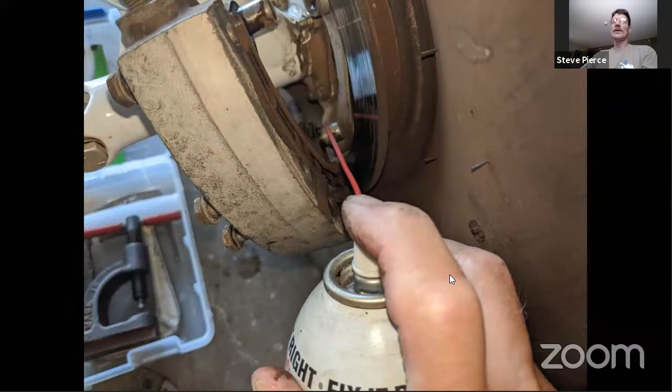But anyway, it's just checking the thickness of the pad here with that little gauge. And if you go to Oshkosh or Sun 'n Fun, Cleveland gives that away. And then this is spraying those pins with silicone spray so that they slide easy.

Checking wheel bearings and taking a wheel off and all that fun stuff.

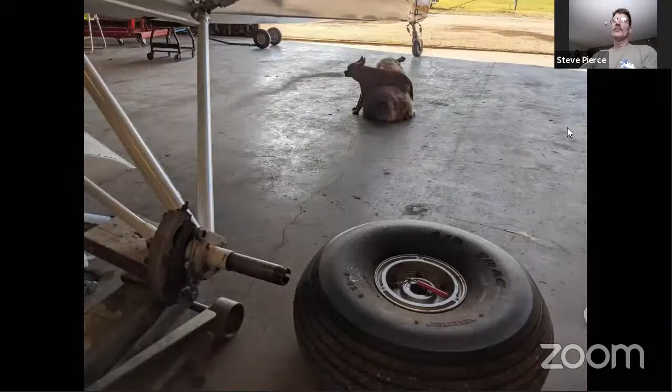Paco sitting on dozer.

They're a bonded pair, but like on small tires like this, I just use a floor jack with a block of wood under it, put it underneath the axle. On bush wheels and stuff, I've got a hoist, a come along in the ceiling, and then most everything I maintain on big tires has got the Alaskan Bushwheel lifting eyes on it, so I can pick the airplane up and service the wheels that way. It's hard to get underneath a big tire with a jack.

That Bogert jack works real well, but they quit making it. So anyway, I've also got a piece of angle iron that's the right length, I can stick under there and pick up one side with a floor jack. That works real well too. It picks up on both axles, and then you've got the floor jack further on one axle, and you pick it up off the ground. That can always be a pain.

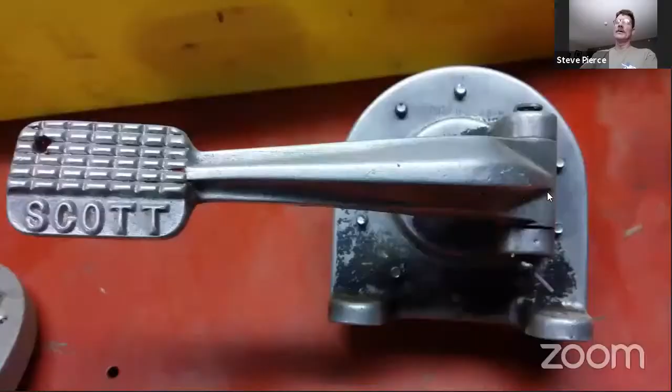So the Scott pedals, most all Super Cubs have. It's a cast aluminum part, and if you've got stock brakes, there's a rubber diaphragm in there, and it's moving a high volume of fluid at a very low pressure. With big tires—I mean this one's still stock—but with big tires you want some more brake, so people put brake boosters on.

So where that pedal comes off, this pivot point right here is known to break. There's broken ones, there's one where it broke off, there's one where somebody drilled a new hole, there's one where somebody welded it. I've got boxes of these things. So look at those ears and make sure, because people romp on those brakes when the airplane's not going the direction they think it should. They think if they push harder on the brake, it's going to start going, and unfortunately the brake pays a price a lot of times.

And these are Huff master or parking brake valves, and they're cracked where somebody screwed the fitting in too far. Most of the time you've got a Scott valve, but I've seen a couple of Cubs that have these Huff valves in them.

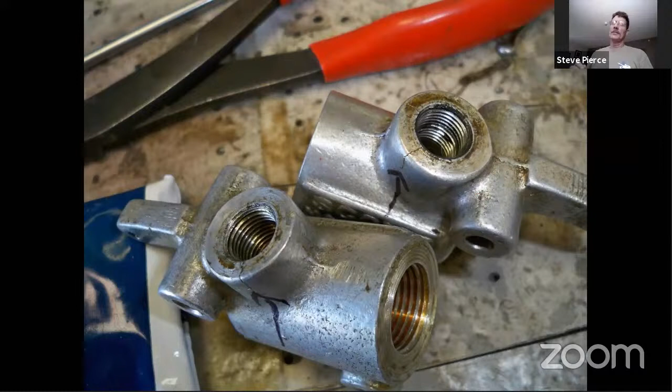These are the original diaphragms, and this is a ruptured one, but you can't really tell until you push on it—there's the rupture. We landed on a gravel bar in a 90 horse Cub, and he kept going. I was like, what the heck's he doing? And then he kind of went 90 degrees and all kinds of red fluid ran out.

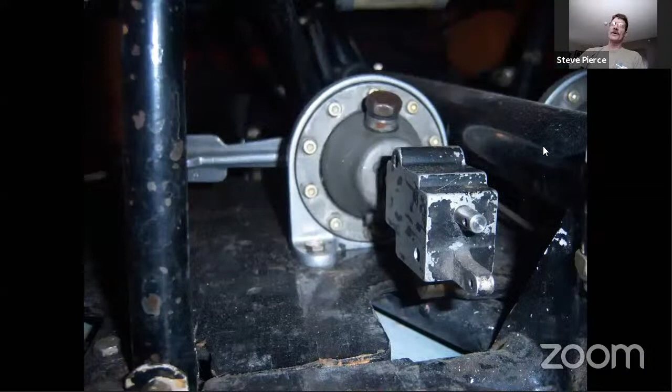So here's the stock setup with the Scott parking brake valve. And then I use these—these are NAS cap screws, Allen head screws. Makes it a lot easier to put those in.

You've got a lot of options on brakes, and I'm not trying to push anybody's brakes, but I've had the best luck out of Dakota Cub brakes and Steve's brakes because they're the two that are vented. When Tom and I were flying together, my Cubs had Dakota Cub brakes, and Tom had North River, which is now Airframes, and he was having to put fluid in and take fluid out depending on if it was hot or cold, because it's a sealed system. It doesn't make up for temperature or atmospheric pressure. Where the Dakota and the Steve's have got a vent, they're vented, so you have a reservoir, you put fluid in it, check it at annual, and leave it alone.

When I was talking to Mark Engelert earlier, he said if you've got the non-vented brakes and you want to get real good braking, you push the brakes and get the pads as close together as possible, then pull the parking brake valve on, top off the cylinder, put the cap on, and make sure you can move the airplane around. But that was Mark's suggestion.

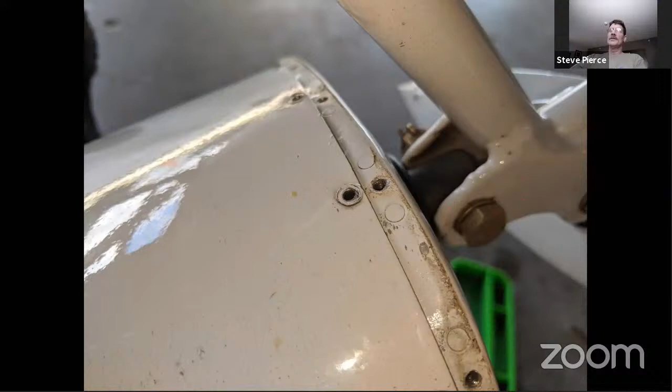These late model Cubs have got a fairing that goes around the brake line where it comes out of the fuselage and goes down the gear leg.

This is the cabane fitting that, in that oops video, Bill Tracy's airplane had the broken cabane fitting. You can see the cabane fitting real good in this picture. Keep that stuff clean and look it over, because it has been known to fail.

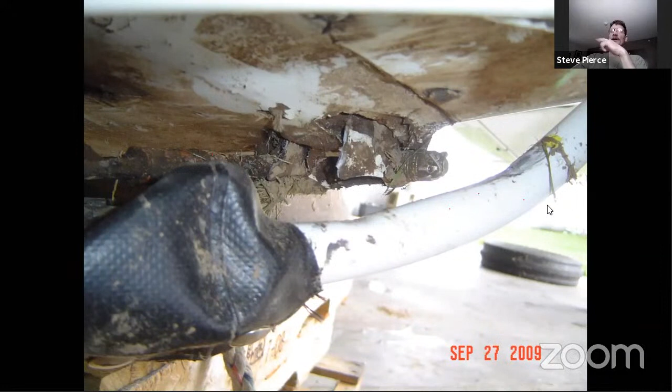There's Bill's - I had breakfast with Bill this morning, actually. That's the result of that cabane fitting breaking, even with the safety cables, and that's still kind of a mystery. I think it shifted to one side, and the safety cable doesn't do good in compression. So anyway, there's that failed fitting.

Is that the last one, Steve? That's your last slide, Mr. Pierce. Wow, I still have a voice, and Lee hasn't thrown a pillow at you, and Kathy hadn't wrung your neck. So he woke up, he's over here pissing and moaning, but you know. But anyway, well, just maybe real quick, if anybody's got any last minute questions, we can do that, and then we can let you get to bed so you can get on with your life tomorrow.

Well, I think that was awesome. This is three parts - it's like seven and a half hours, an hour and a half, three, it's almost five and a half hours of going through an inspection. This is a bad bungee cable, Wendy just sent me this.

I think she got all the good use out of that she could, if that's Wendy's airplane. But anyway, so if it only takes five and a half hours to do a whole inspection on a Super Cub, how come it's so expensive?

You've been here when we've done an inspection on a Super Cub, you know that. You've got to take a lot of phone calls right in the middle of the work, and you've gotta watch it because it's dirty. He sits in the office and plays on the computer, and Laura and I do the annual inspection. I fix the computer, I don't play on it, by the way. I hook up Wi-Fi stuff, and he does what he knows how to do, and I do what I know how to do. It's probably better that way.